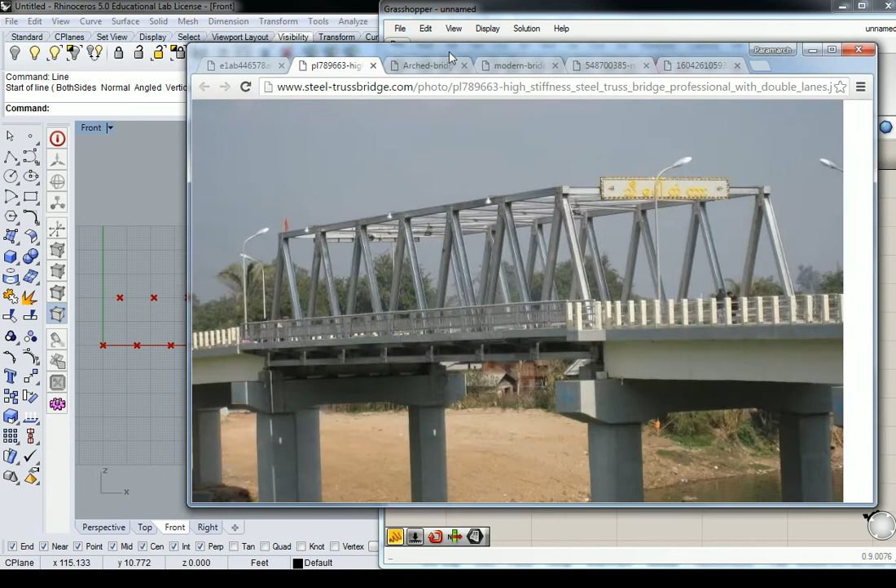So what's going to happen here is if I'm mapping this bridge, I'm going to map a line, right? And I'm going to very simply just do this with lines right now. I'm going to do the skeleton, then we'll worry about the surfaces. But if I'm going to map a line, I'm going to go from the top point to the bottom left point. And I'm going to go from the top point again to the bottom right point, right?

That makes sense, you would think, because on the top rail, you have 2 values that protrude from every point, versus on the bottom you have 1 value from a couple, but you have 2 from most of them. So there's less variability on the top. So let's do that. Let's take a look at what it actually means to do that. So I have my top chord points right here, and I'm going to actually map it using the line command. So under curve and primitive, I'm going to use line.

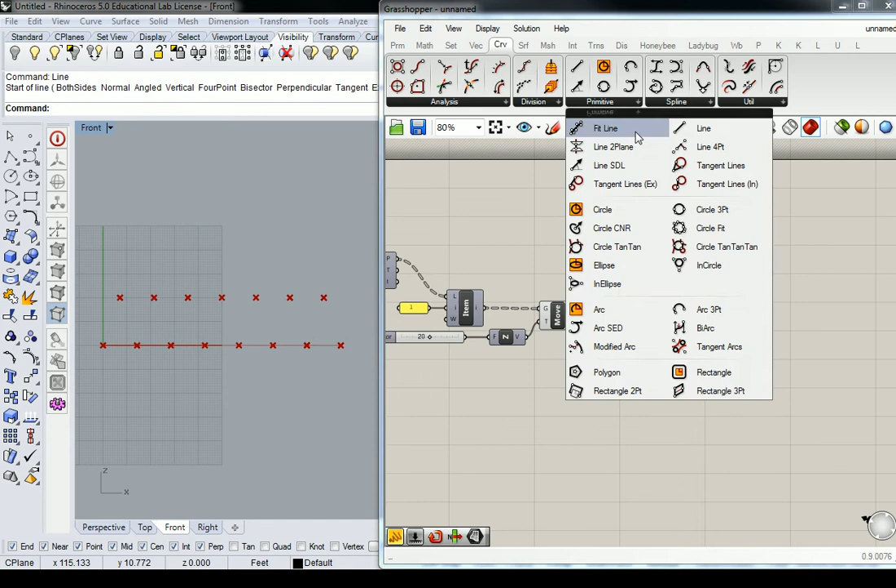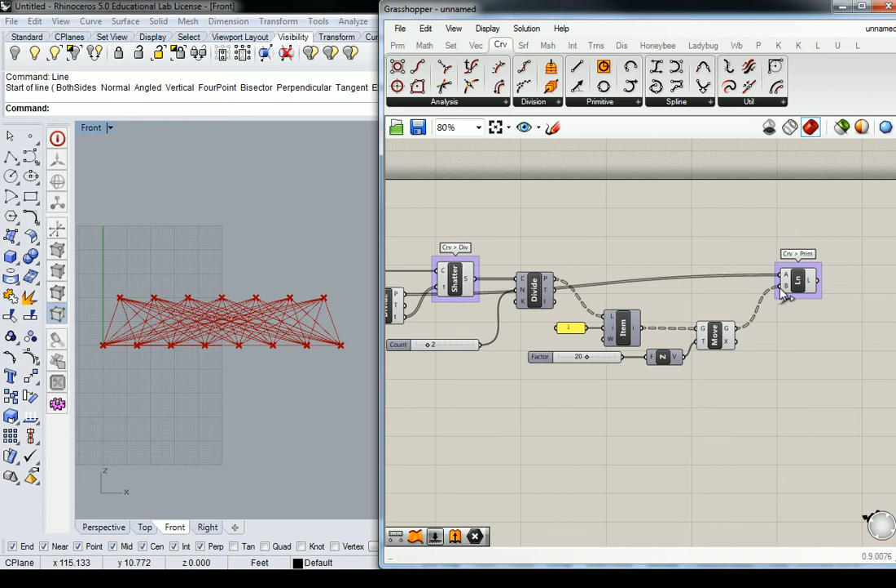And so the key here is going to be if I want to map a line from the top to the bottom, I pretty much want to take my points on the bottom, which are going to be these right here, and my points on the top and blend them together. You would think that works, but it doesn't. So the first issue is that they don't actually match in terms of their organization. So the list that came out on the bottom is a flattened list. So I would actually have to graft that into matching values. And then I get this.

So why do you think this happens? Anybody? It's a product of the difference in numbers in each of the lists. So if you think about it, basically what's happening, the index value of 0 is mapping down to the index value of 0. And it keeps doing that for number 1, number 2, number 3, number 4, number 5, number 6. And then there are no more points for it to map down to the matching list, which has a number 7.

So it takes number 7 up here, and it plugs it down into number 8 as well. So it just repeats the last item in that list on the top chord. So what we have to do is break that bottom list so that we create one list that has index values 0 to 7, and then we have another list that has index values 1 to 8. And then we plug them in and it'll be nice and clean. So 7 values in all 3 lists, I should say.

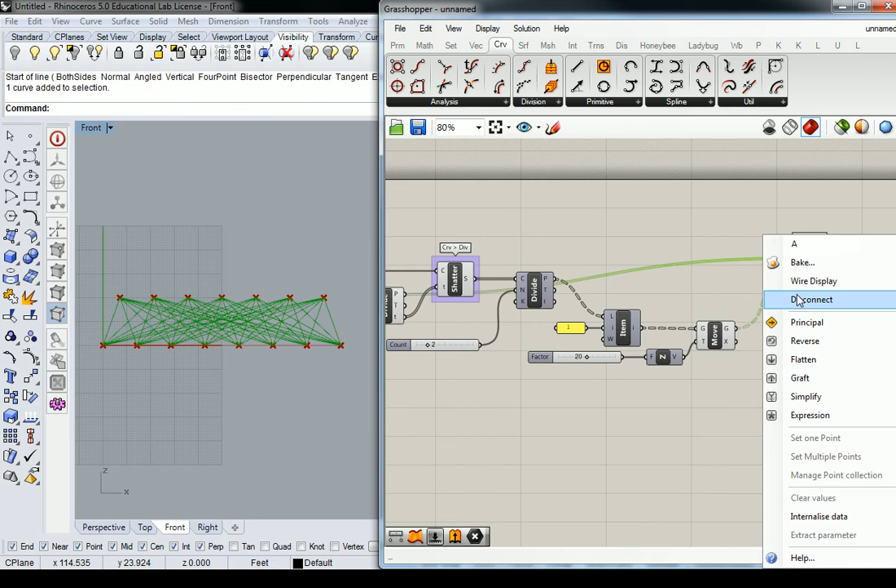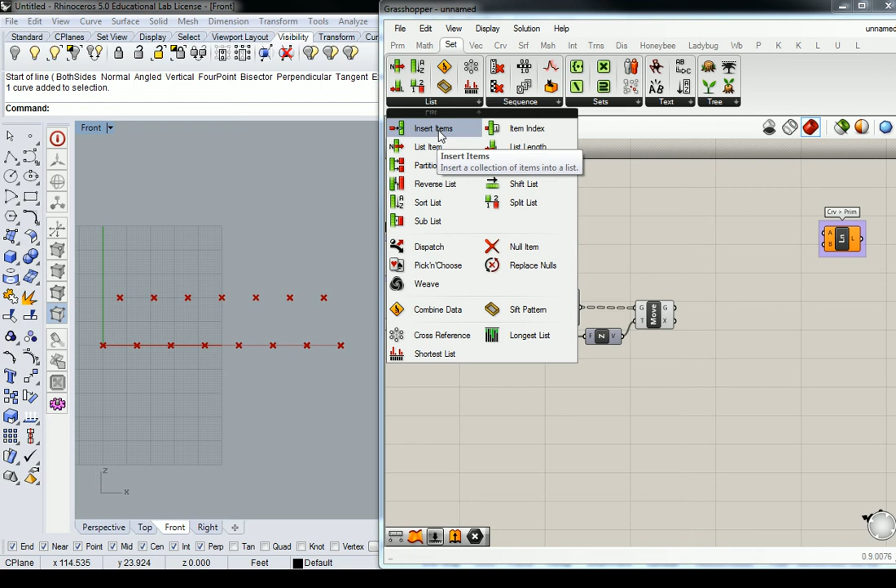So let's take a look at that. In fact, I'm going to disconnect this until we get there so it doesn't look confusing. So let's go to set and list. And I'm going to use, let me figure out which one I want to use. Is this going to do an index to split? Yeah, let's do it with this. So this one is saying that it's going to split a list into separate parts based off of an index value. So that's important because we're essentially going to have to break the list at both a value of 1 less than the maximum length of the list, and then 1 more than 0, right? So just a value of 1.

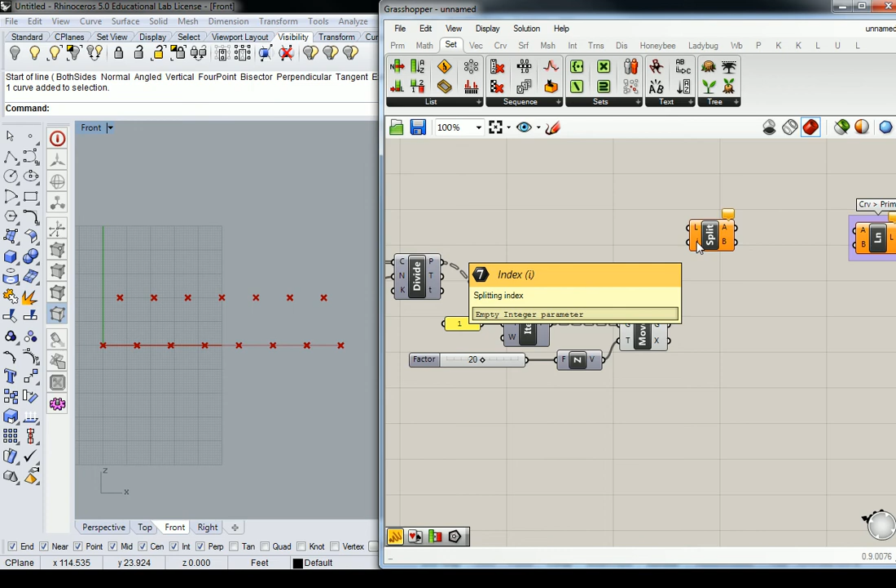And we're operating, I'll slide this down, we're operating on this list of points down here. So let's kind of move it over there. And so the key here is going to be that relationship of 1 less than and 1 more than. So I'm going to start with the value of 1 less than, because the first list I want is going to start from 0 and end at 7. So in order to generate that, I'm going to put in my points list here, and then I just need to figure out the number that is 1 less than the maximum length of points that I have here. And so we can do that using list and list length, like that.

And if you're so inclined, you can use an expression. But in this case, I'm going to try and make it a little bit more visible, because with expressions we have a tendency not to remember that they're there. So I'm going to make it actually visible here. I'm going to go up to Math and Operators, and I'm going to do a subtraction of 1.

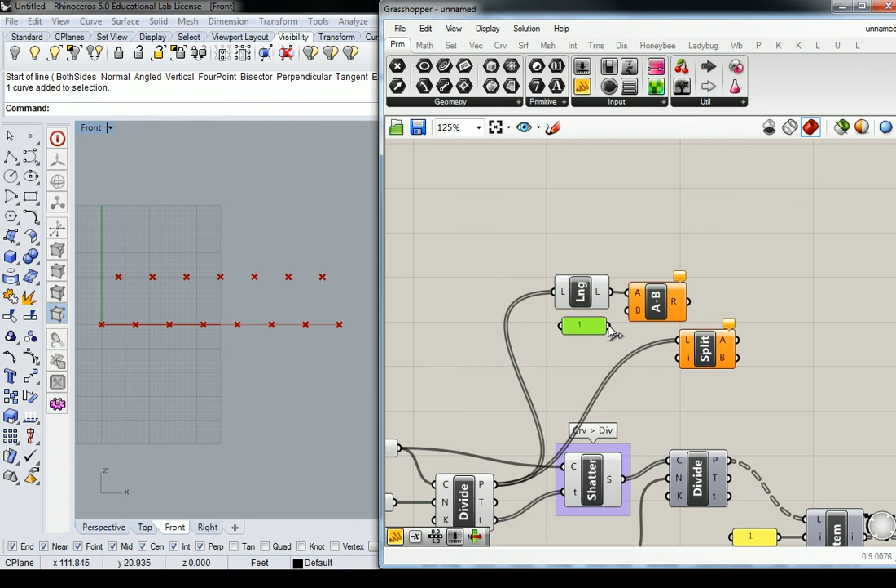List length minus 1. So the list length is 8, minus 1 gives us a numerical value of 7. So this split list gives us 7 values here and 1 value there. And that 1 value is the point that is 100 feet away from the origin, right? Makes sense. That's exactly what we needed.

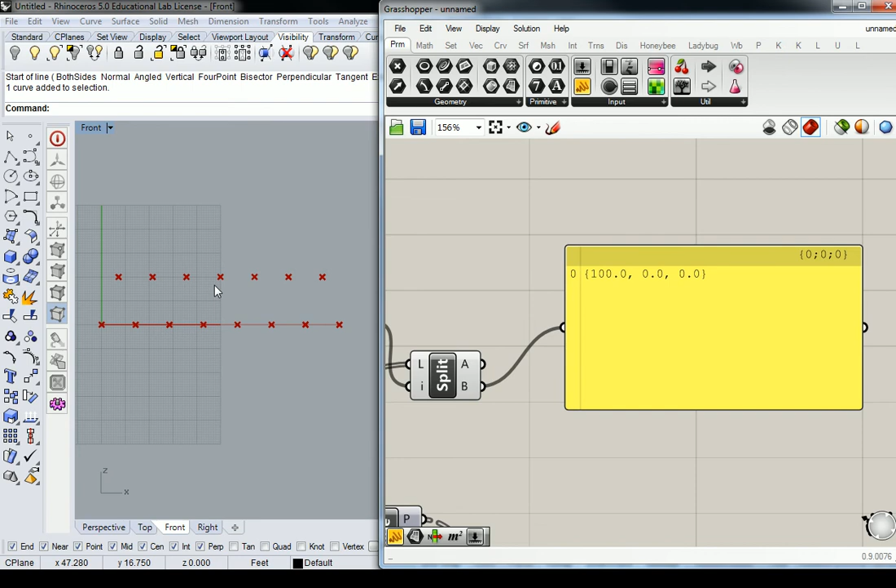Now we have to do the other one. And the other one is going to be a copy. So let's copy it down. That's slightly different. So in this case, we don't need to do 1 less than the maximum length. In fact, we only need to do 1 more than the first index value, which happens to be the number 1. So I can theoretically just take all of that and plug the 1 in here,

and then we'll check it out here. So now we have 1 index value, right? So index item 0 gets split, and then down here we're starting at the new index item 0, which actually was index item 1 in the previous list. How confused are you? Okay, well that's good.

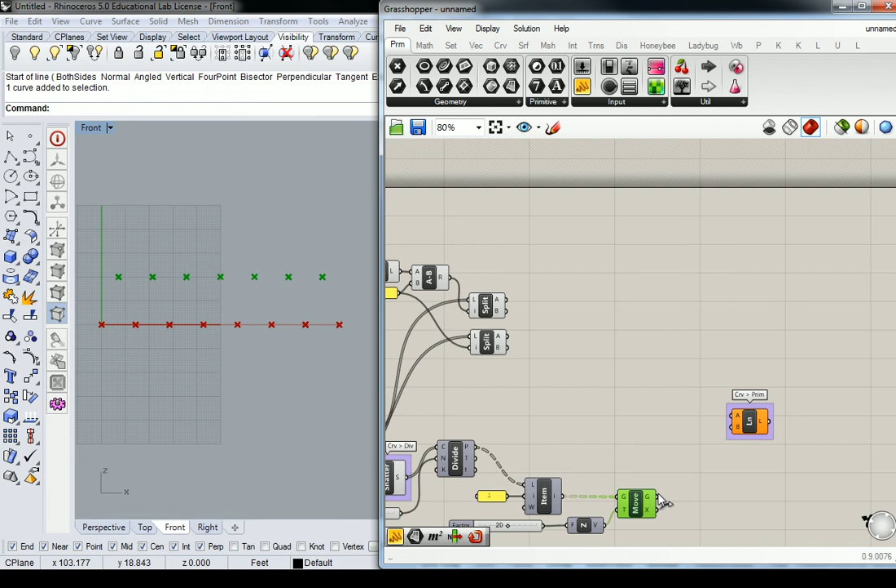So then here's the key. Instead of plugging it in down there, we're going to have to plug in a line from the top chord to our first list, and then the top chord to our second list. So I'm going to put my geometry up here, and then I'm going to plug my first list in, and make sure that you pick the correct output. So A is the first partition of this list. So that's the one that has my 7 values. And again, that's going to have to be grafted.

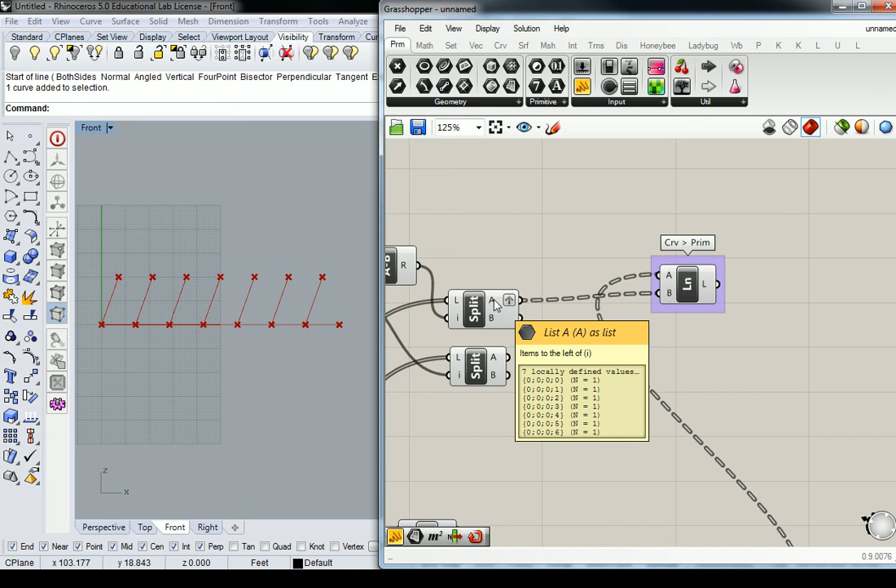And just as a rule of thumb, guys, wherever possible, I try my best to graft on the output. Do any of you know why? Rather than the input of the line, why I put it on the output? So that I can visually see that it's a grafted list. Right? Because if I put it on the input, all I have is this little tag that tells me that that list is grafted. Okay? But if I do it this way, as long as I can, right? You can't always do that, but as long as I can, I'll know that that's a grafted list.

Okay, and then copy and paste this and replace the connection. And remember that this one is not going to be the A output, because we took the first item and we threw it out. We're going to take the B output here and plug it into B. And that, again, should be grafted. Voila. What do you think? Awesome?

Okay, so one more thing I want to throw in here. The cool thing about doing this particular exercise this way is that it automatically generates our endpoints to map our top chord. So if I take my line and I copy it up to the top, and instead of these connections here, so let me disconnect them. Instead of these connections here, I use the endpoint. Oh wait, no, that's not the top chord. Crap, never mind. I was thinking of something else. Let's see.

Yeah, so the top chord is going to be a product of this list. And so you're going to want the first and last item of this list. And so essentially you can take this value here and copy it down to that one. Sorry, I screwed that one up on you big time. But just replace the geometry value into these lists. Actually, sorry. Do it this way. Use a param for a points list, because these are all grafted into separate groups. So use a param and then flatten the list. And then plug it in. Do you all understand why I did that?

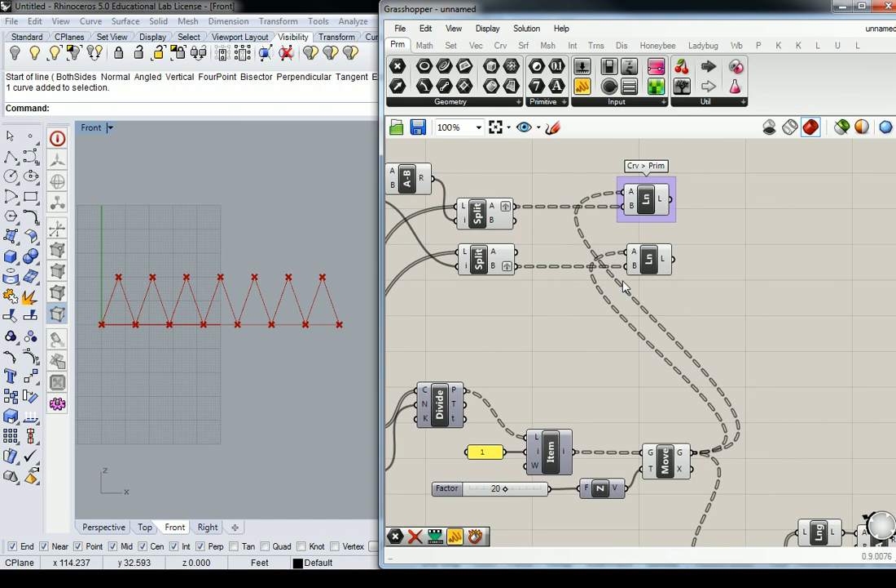Yes? No. Okay. So the reason that I did this is because what I'm doing here is I'm reading a list of items that have index values 0, 1, 2, 3, 4, 5. If you have a grafted list, like these values up here, they're coming out as groups of index values of 0, which means they don't have an index value of 1, 2, 3, or 4. They're not flattened. They're grafted into separate branches of data. Okay, so down here we have to flatten it so that it reads as a list like this, so that we can use it to extrapolate our 0 and our 6 value to draw a line for.

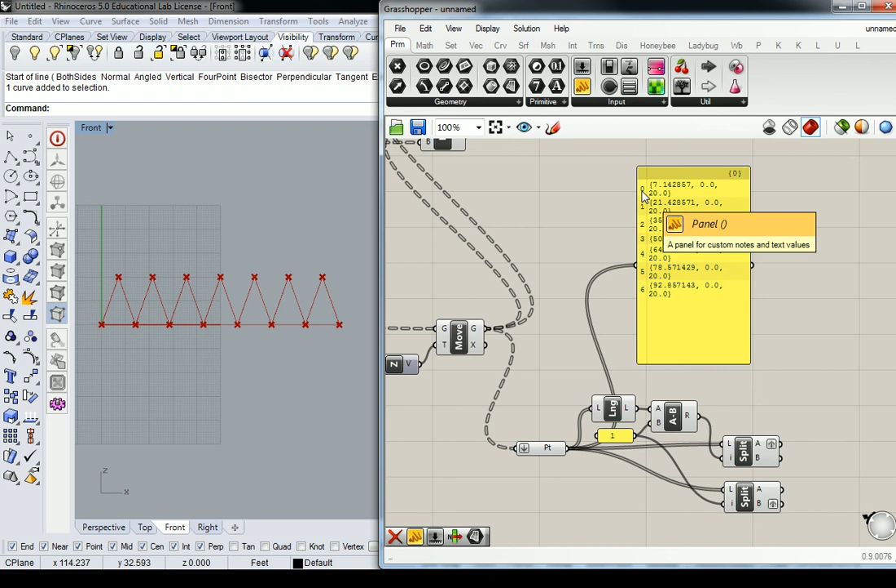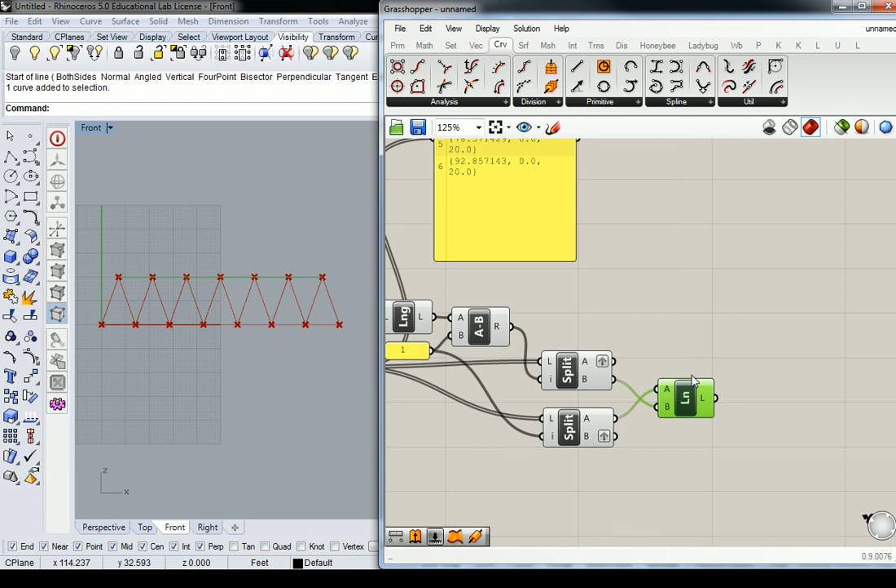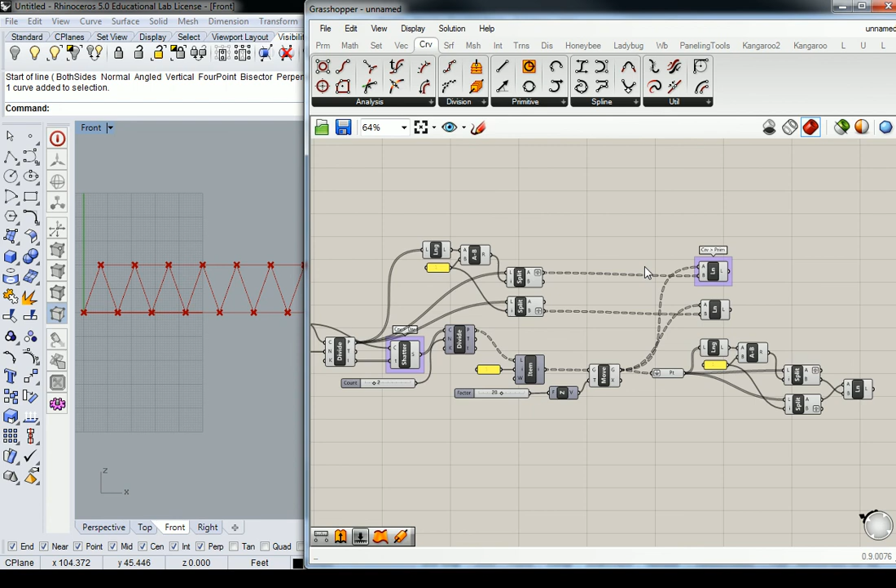So the result, everyone, is that now we can take a curve, primitive line, and instead of the A and the B value, we use the inverse, right? We use the culled out front end point and the back end point. Yeah. So the front end point would be the A here, and then the back end point would be the B here. And that gives you your curve. So let me clean this up for you all a little bit so that it's a little bit more readable. What questions do you have? All right. So I'm going to get you all caught up before we move on.